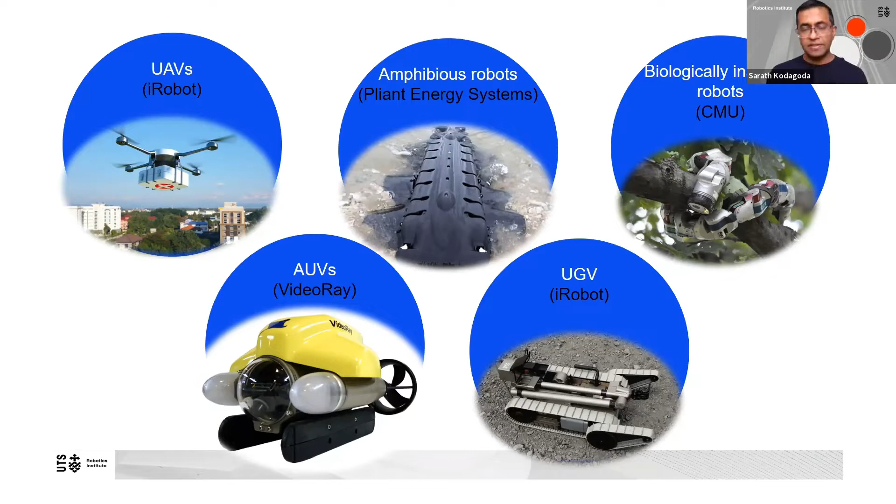But today, what I'm going to talk about is how the work that we are doing currently, which is in the areas of robotics for infrastructure maintenance and inspection, how can we use that technology maybe in disasters.

So I'm going to talk about a few of the pilot studies or examples, research areas that we work on, to give some understanding about how this robotics is evolving, what are the state-of-the-art robotics technologies which have been used to inspect and maybe repair different infrastructures. So one of them is critical water pipes, those are underground pipes, or underground sewer networks, or bridge inspections above ground, or the pylon inspections.

So when you look at the critical water structure, it is huge in any country. When you look at UK, US, and Australia alone, it is worth over $500 billion. And if you look at Australia alone, over 140,000 kilometers of underground pipes to deliver water from one place to the other.

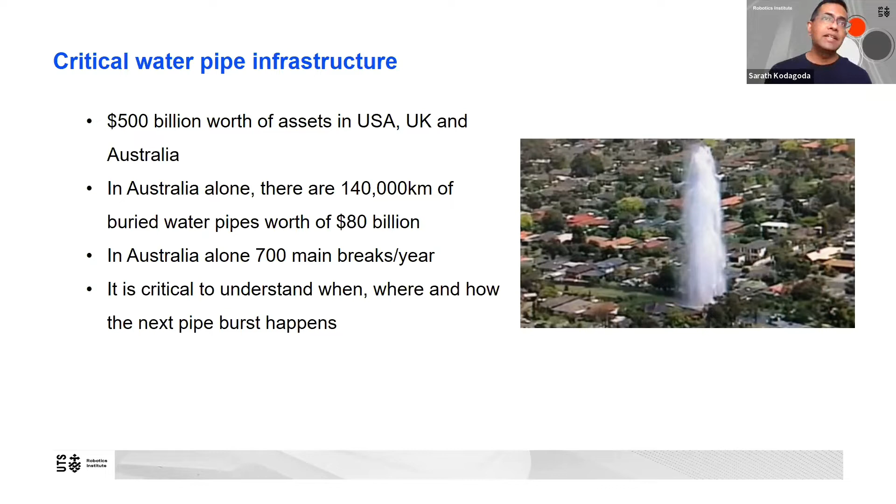Then how can we inspect that? You can't dig everywhere and expose the pipe and start inspecting. You need to have some other mechanisms. One of the ways of doing that is to insert a robotic system which goes inside the pipes and then estimates how much corrosion happens, or in other words, estimates what is the remaining wall thickness of those pipes.

In the context of Sydney or New South Wales, most of the water pipes are cement-lined cast iron. It has a certain property of failure. It fails by destroying itself - in other words, it is brittle. The steel pipes don't have the same failure mechanism, but cast iron is going to be brittle. It will burst open.

So the corrosion which can happen because of the corrosive soil, or internal corrosion can happen because of the presence of moisture - both can corrode, but because those are cement lined, the internal corrosion is less. Then it's a matter of coming up with sensing technologies in order to figure out how much is the remaining wall thickness, and also to figure out how these sensors can be deployed in pipes.

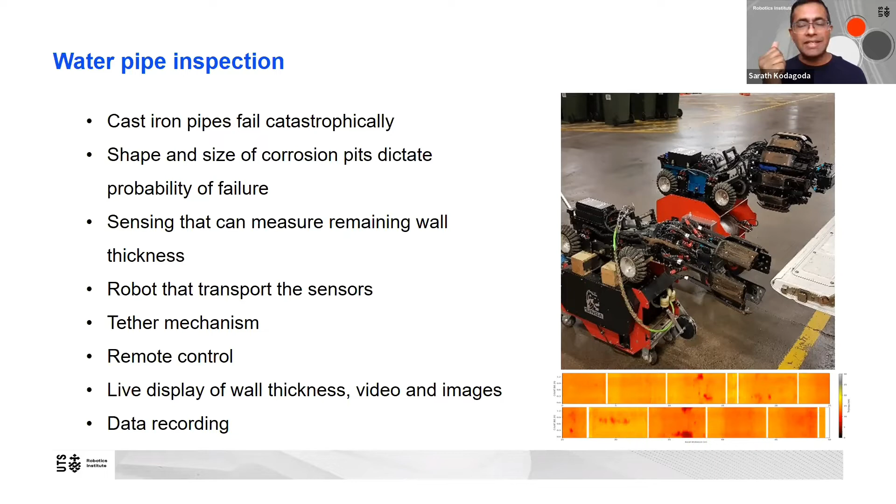So, different requirements from different utilities. As you can imagine, the water pipes are bigger and small - it has a huge range. The water pipe coming to your house is small, then it gets bigger at street level, and even bigger at suburb level. So it has a range of diameter. How could you design something in order to cater for that?

There can be bends - 90 degree or 45 degrees are common. So how could you still manage those bends? So there are many challenges.

And the other challenge is, in most cases, the team that RI, Robotics Institute, how they are working at the moment is, when a pipe burst happens, Sydney Water calls in that team at UTS. So that team goes there and takes that as an opportunity to deploy the robot from that burst point, because the pipe is already shut down, and then go both sides and estimate what is the remaining wall thickness. They don't want to see any other burst happening next to that site.

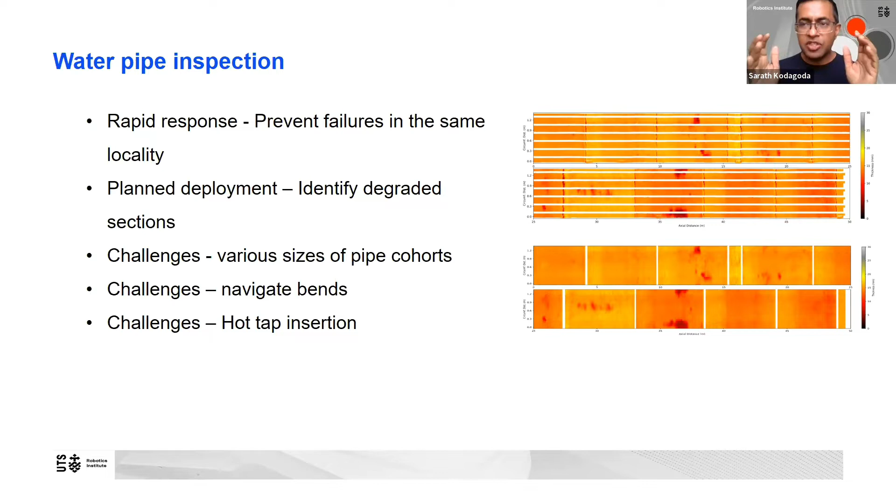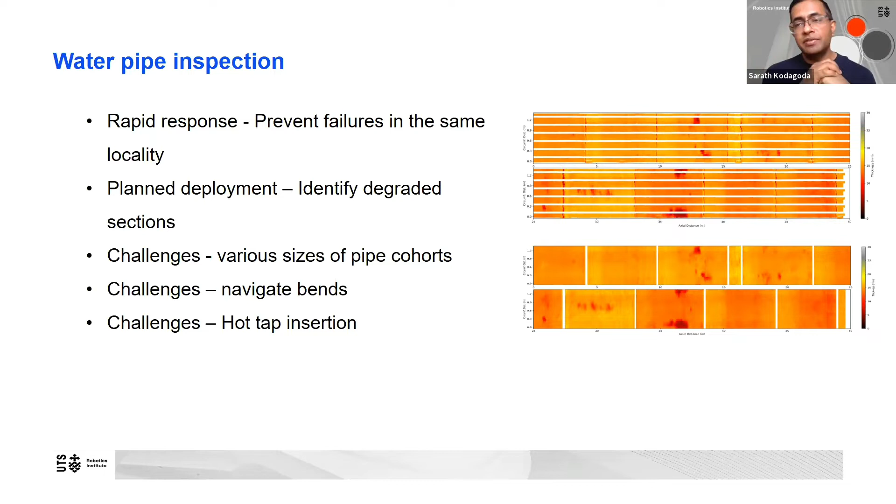The third type is - in the two types I mentioned, the main need to be shut down because those are high pressure, and it's very hard to work with that. The third type the team is working on is what we call hot insertion type robots. They want to use a water hydrant, and with the mechanism, the robot is going to be inserted while the high pressure water pipe is in operation. So it's very challenging, but the team is working on that.

So I'm going to show a video here.

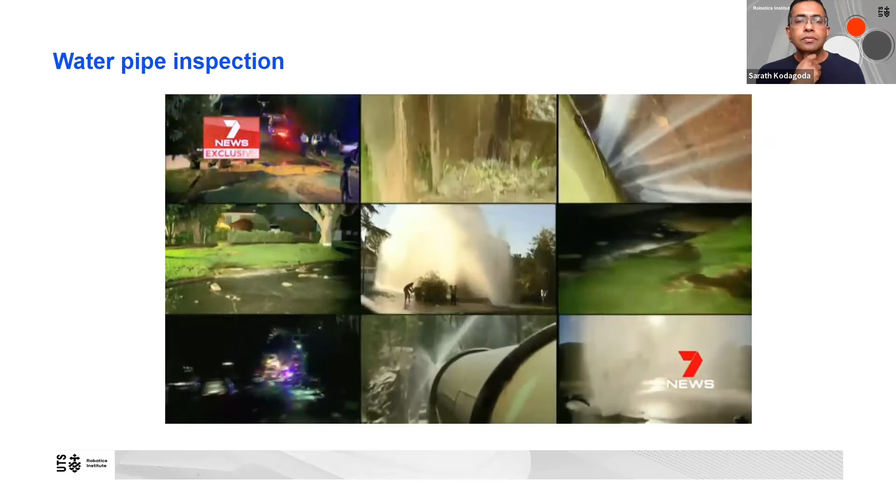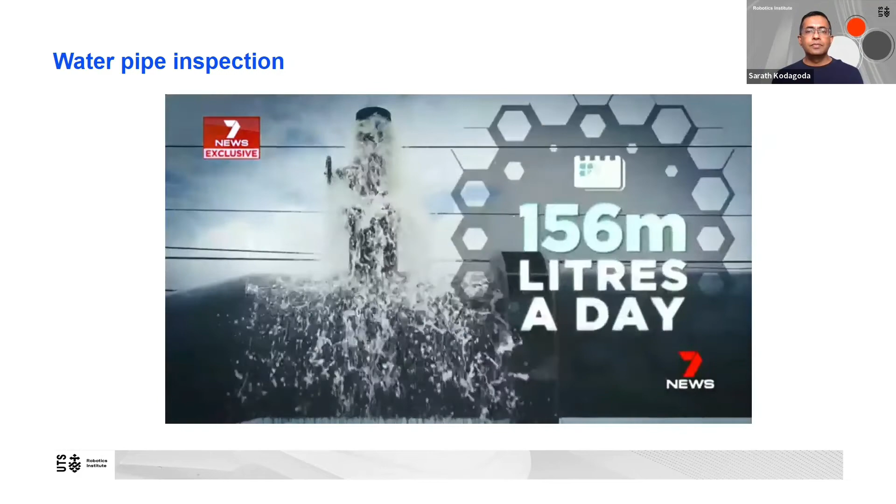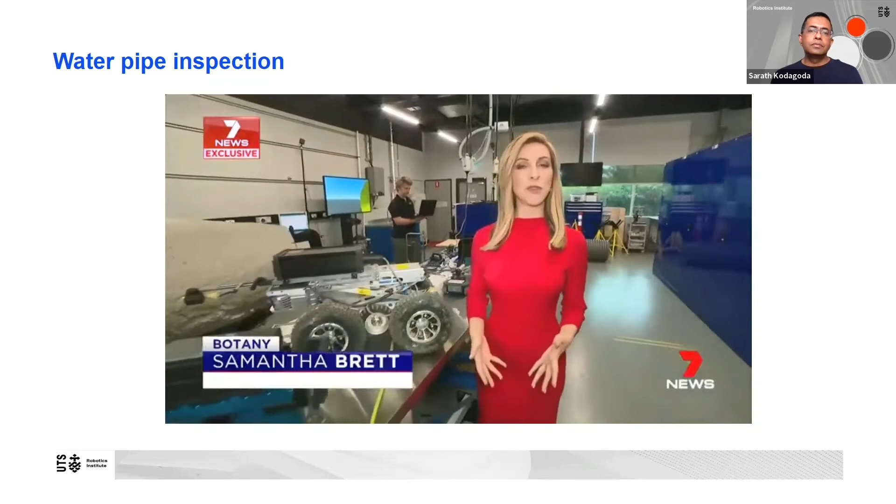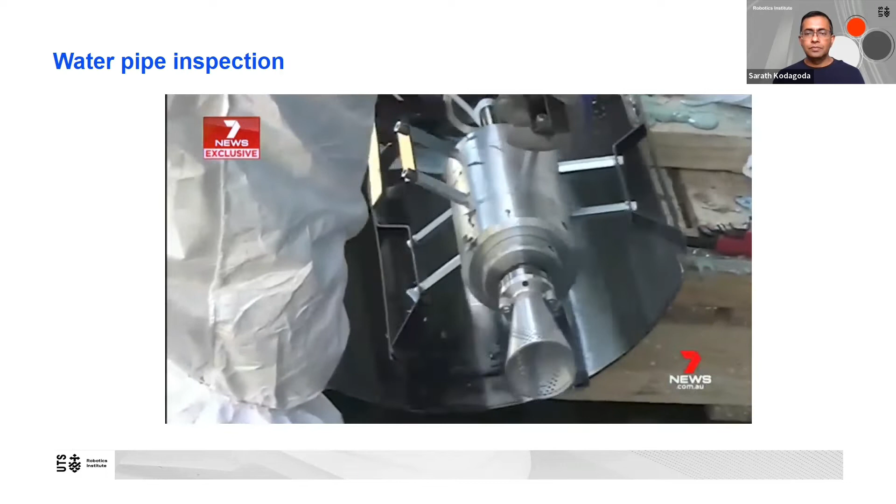It's called the R2-T2 Rapid Response Robot, being used right under our homes across Sydney. A new solution to an old problem: leaking water mains, wasting precious water at a time of drought. One of the challenges in a drought is that with the drying surface underground, it can crack pipes. Sydney has around 175 major leaks every year, losing 156 million litres per day - that's more than 60 Olympic swimming pools. Now cracks and corrosion can be detected without digging. Today we were given an exclusive first look at the high-tech solution. Really exciting - there's a whole host of possibilities in terms of what the technology can offer. The R2-T2 is the first of its kind in the world, and now Sydney Water is hoping to create a fleet of robots to cover its entire network, and other parts of the country are now interested in the technology. Created by engineers at UTS, technicians can watch in real time using virtual reality headsets while the robot surveys the pipe. And to have this technology now at the front foot of ensuring that our water supply extends as long as it can is really important. The cracks can now be fixed with quick drying epoxy spray coating - no need to replace the entire pipe.

One reference in that was the drought, but this video was recorded some time back when we had the drought. Now, most of you know that we are flooded with rain, so it's a different scenario, but the problem itself is still there.

The other aspect I wanted to talk about is the other type of infrastructure, which is sewers or wastewater pipes. Again, any city has a network of infrastructures. The difference is they may not be metallic - they may not be cast iron or cement-lined pipes. Most of them that you see in major cities are huge, and they are not really round shape. There could be many different shapes. So the challenges are different, and most of them are cement or concrete tunnels, reinforced or not reinforced with metals.

Australia alone has around 120,000 kilometers of sewer pipes. It's long, but as you can imagine, the sewer pipe going from your home is small. When it goes to the street level, it's bigger. When it goes to the suburb level, it's even bigger. And even in the cities, this could be huge, so that people use boats to go in there and do the inspection.

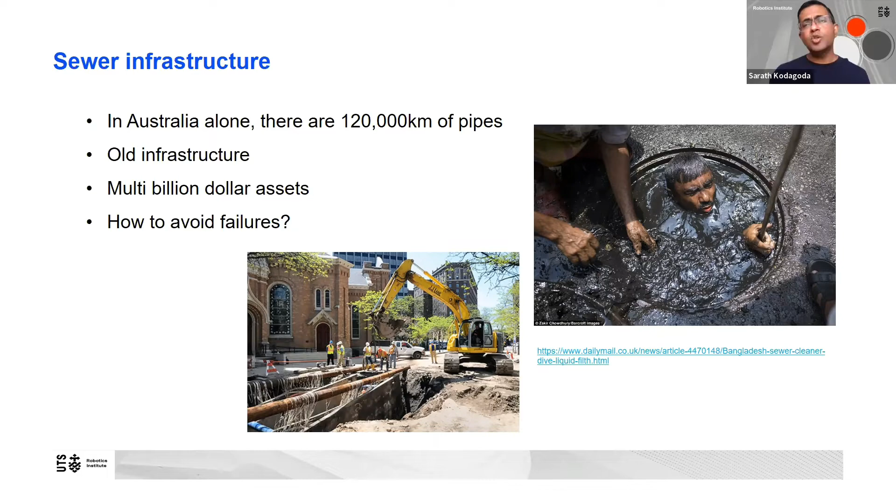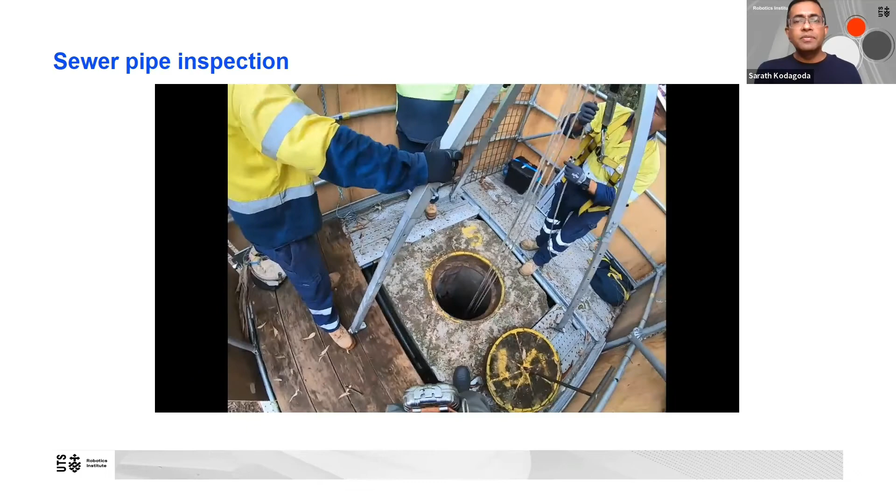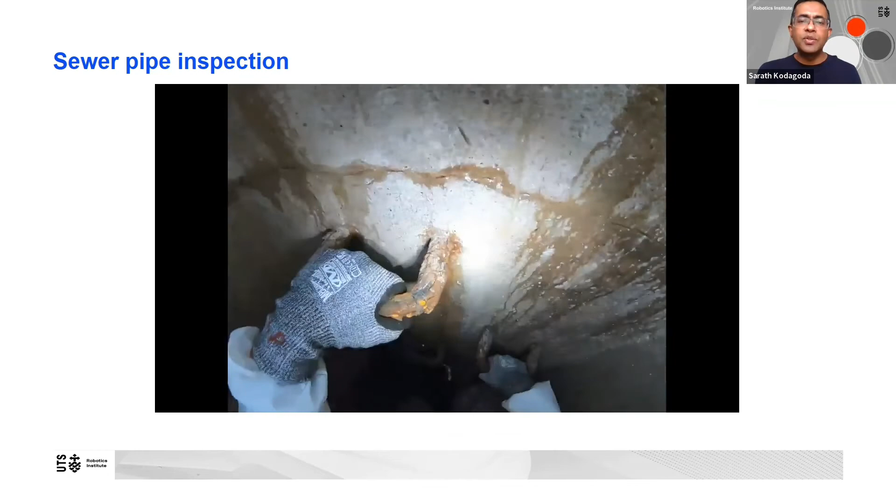This will give you a brief rundown of what a sewer looks like. This is one of our guys going inside the sewer from a manhole. Think about this - it's a very small manhole, and he's capturing the data while he goes down because there's a GoPro mounted. And this is supposed to be a reasonably good sewer. So he goes down, have a look.

What we are dealing with is something like this. There are other pipes connecting, so water can fall from there. There are cockroaches and other species there.

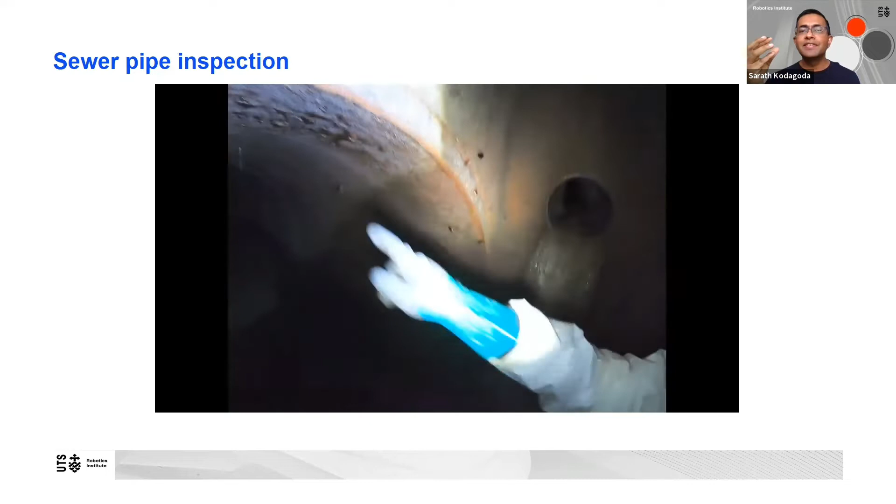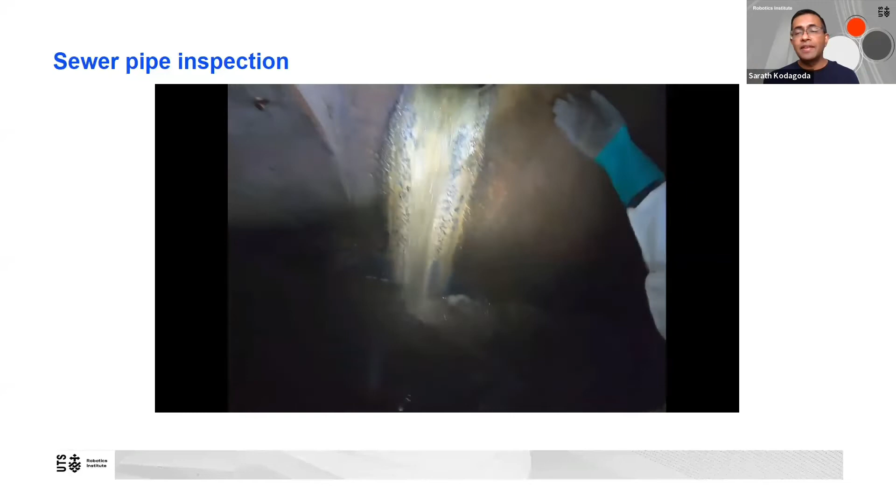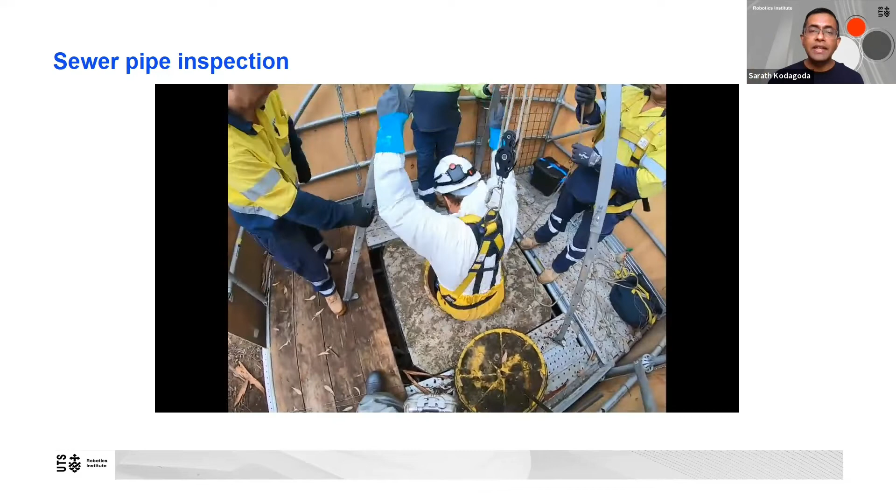There are areas which are corroded, areas where water comes through other pipes causing turbulence. One good thing is the sewer is not 100% full. The bad thing is there are so many things in the sewer.

The things that you flush and the things that are unintentionally or intentionally put into the sewers - everything is there. Just to give a brief idea about how sewer corrosion happens, I use the word corrosion - this is not metallic corrosion, this is concrete corrosion.

So when we flush things, there are sulfates in that waste, and then in anaerobic conditions, this converts into hydrogen sulfide. This is dissolved in water, and then when turbulence happens, it becomes gaseous hydrogen sulfide. There are bacteria living on the surface who consume that hydrogen sulfide and convert it into sulfuric acid. Sulfuric acid attacks the concrete, making it brittle.

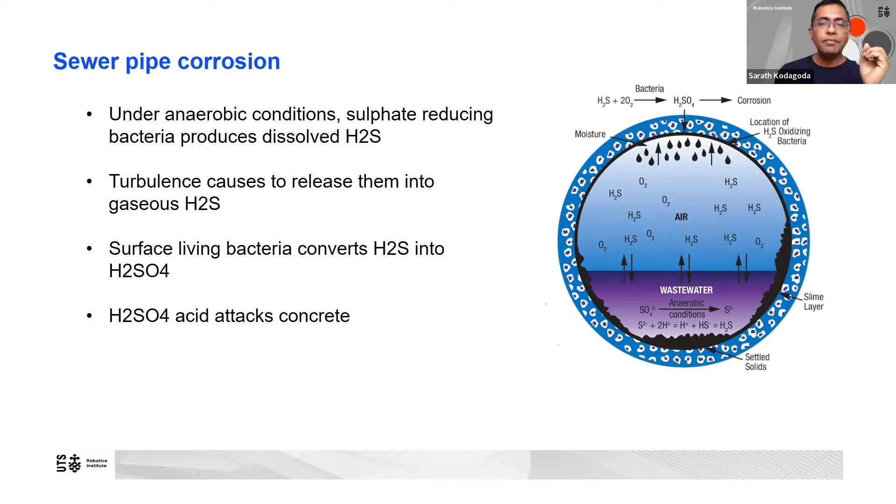That is called corrosion. So in the sewer, you have a corroded layer or brittle layer, then reinforcement bars, and then the good concrete. If you send a CCTV, you will only see the surface - you don't know how much corrosion or brittle concrete there is. Without knowing that, it's difficult to do rehabilitation because you don't know what you are looking at.

So the project we are working on is to identify what good concrete is left - what is the level or depth of good concrete remaining.

We have developed this robot, which floats because you can't normally stop sewers. There are so many things in sewer water, including human hair and tissues, which can easily clog a wheeled robot. So this particular robot was designed in such a way that it floats with gravity.

At the same time, it can expand its arms, which have sensors like ground penetrating radar or pulse eddy current, in order to scan what is happening underneath the surface.

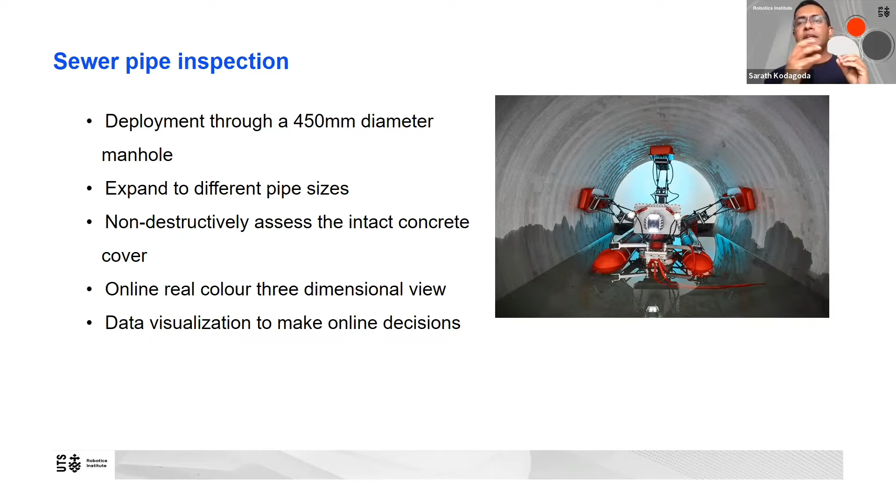At the same time, it needs to be tethered - otherwise it's very hard to retrieve if something goes wrong. So what we proposed is manhole-to-manhole deployment, which could be up to 300 meters between two manholes. So you deploy from one manhole, it goes to the other manhole, and you retrieve it from there rather than having to pull it back.

So this is what you see once you do that scanning. It will three-dimensionally reconstruct what the tunnel or pipe is, and then figure out whether there is corrosion and what the depth of that is. You can overlay that on this.

Then it will figure out where the reinforcement bars are with respect to the surface, and that is integrated into this visualization. So you have all the information you require in order to make renewal decisions.

And this is one of the deployments. It is logistically significant - you need to have tripods, you need trained people in order to deploy it through that manhole, and then you have a remote control station in order to visualize and see what is going on.

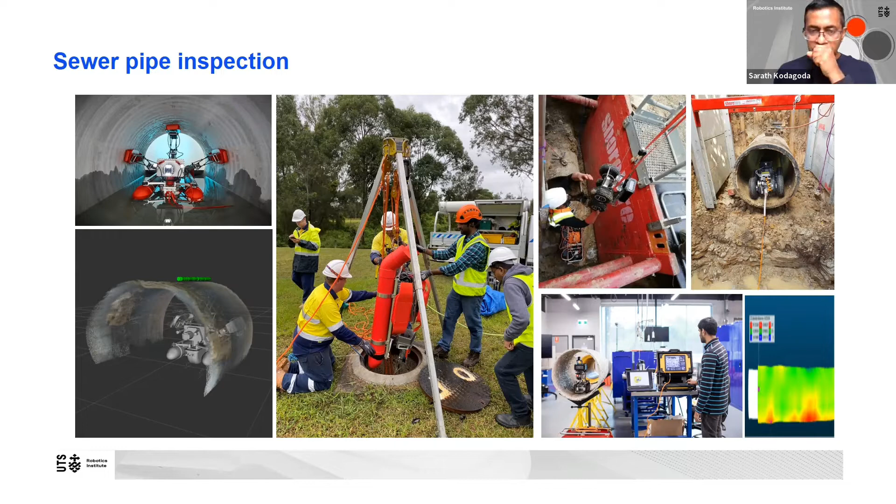This is another video that will give you some background about this sewer robotics.

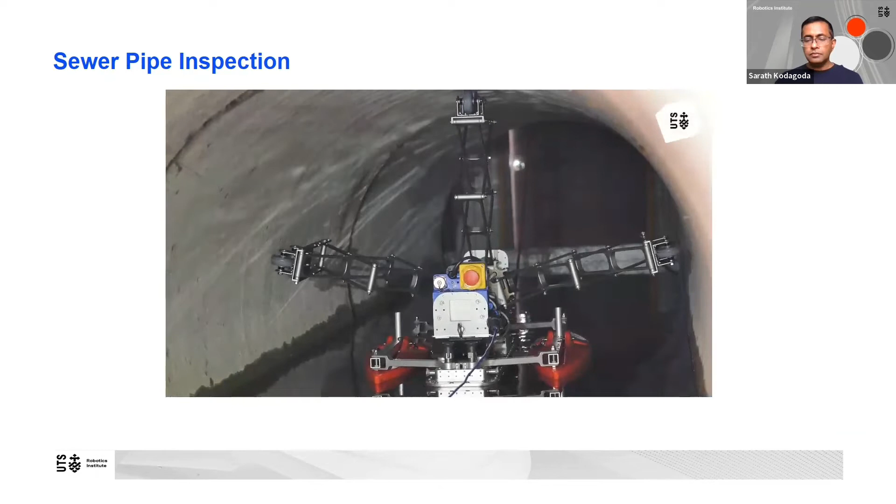Sewers are an integral part of any society. This issue is an international multi-billion-dollar problem for water utilities around the world. Today, we walk the sewers and make decisions based on judgments rather than evidence. This is a great innovation that would be useful to any utility around the world.

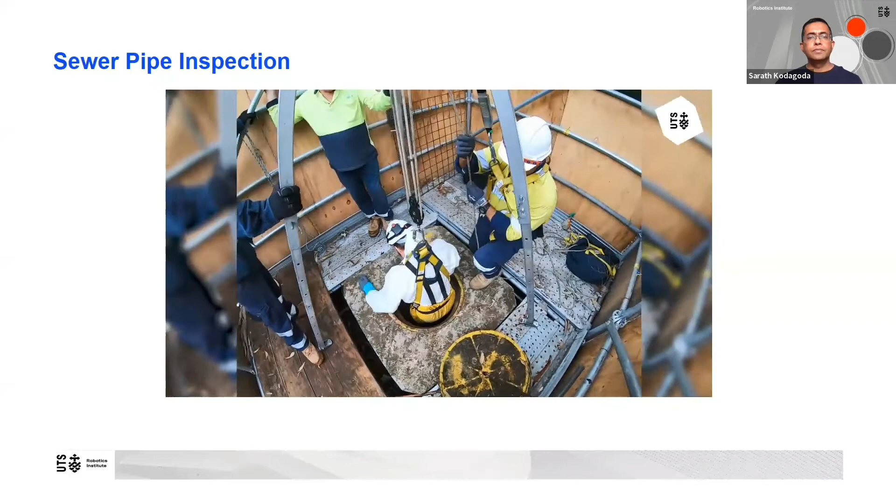Sewers obviously carry wastewater from our homes and industries, and have operational, environmental and asset concerns. We're looking to address that by finding new ways of doing things with our partners at UTS.

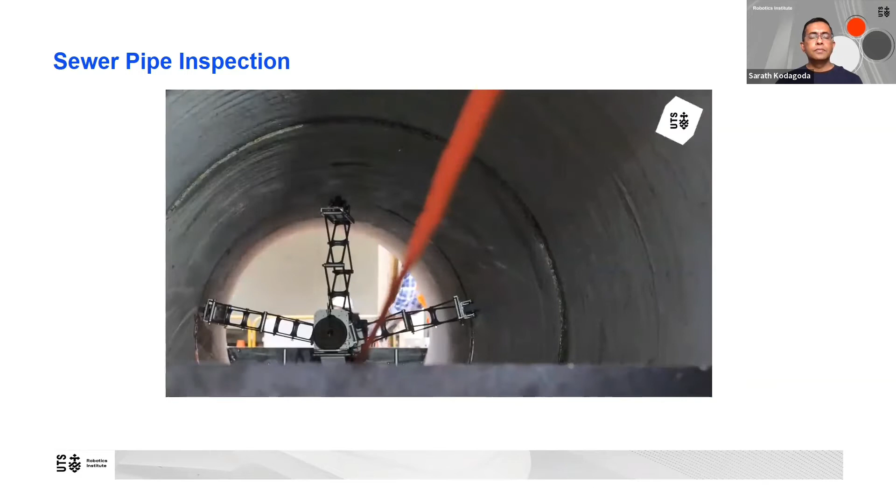This project has two main challenges: one is in sensing, the other is in deployment. The sensing challenge is handled through a multi-sensor data fusion approach, with sensory data coming from different sources, combined through state-of-the-art machine learning technologies.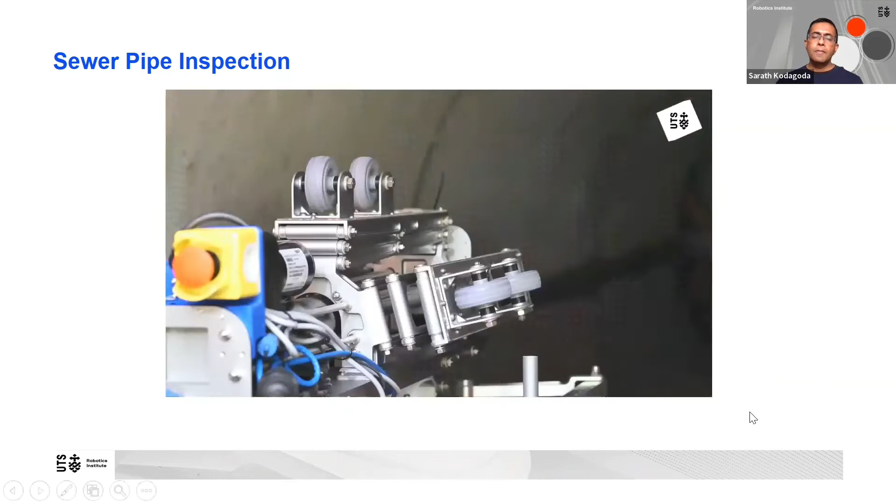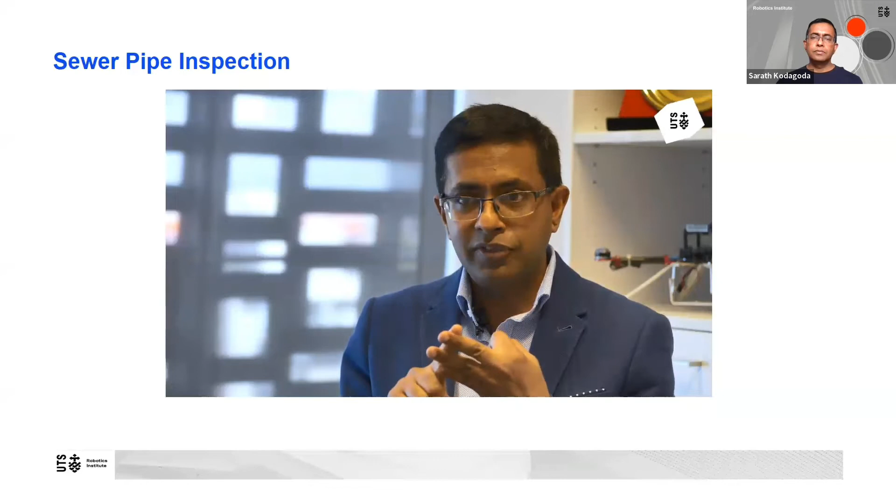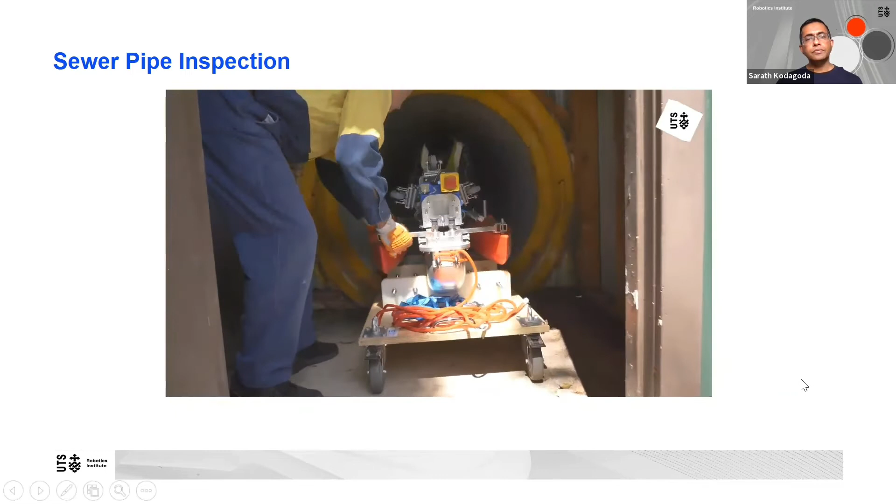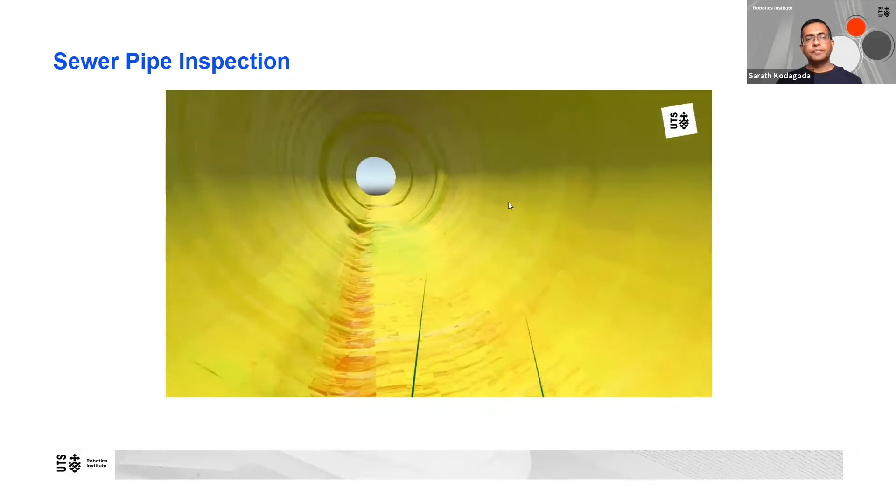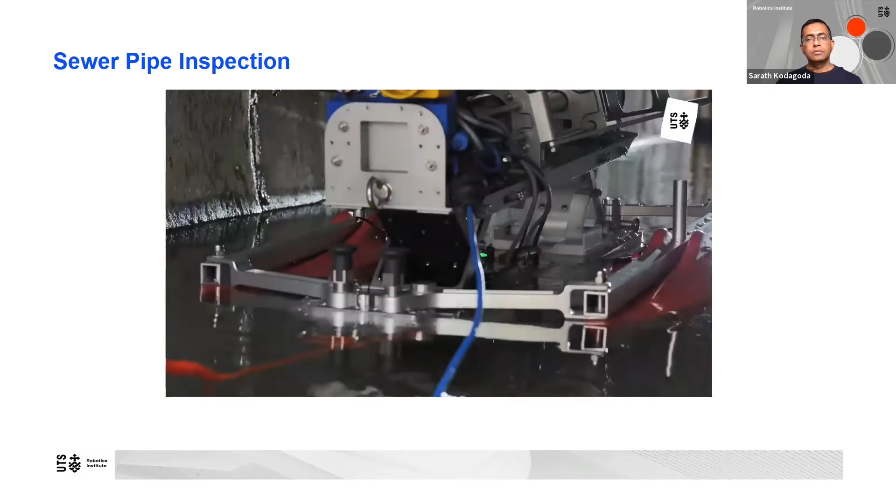Finding new and better ways of working through innovative technologies is really important to us at Sydney Water. We spend around $40 million a year rehabilitating our sewers to make them work for our community and our customers. We have found that working with UTS, identifying new technology in robotics and sensors, allows us to do it cheaper and more efficiently.

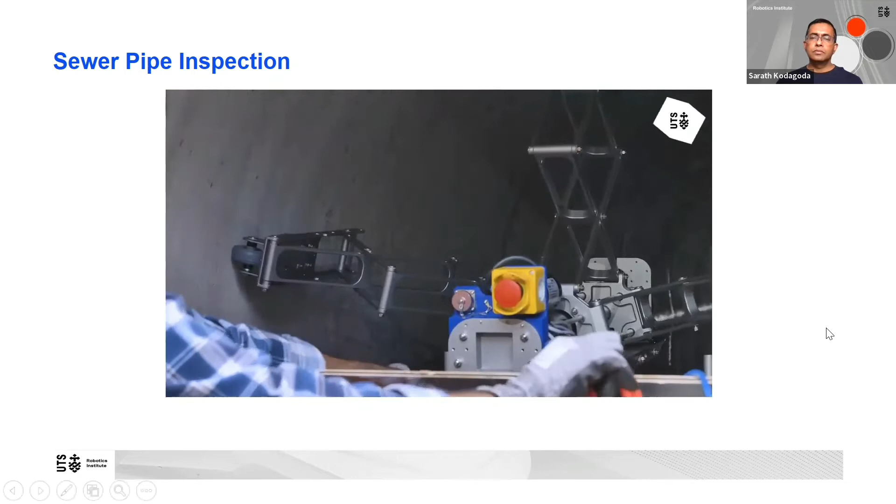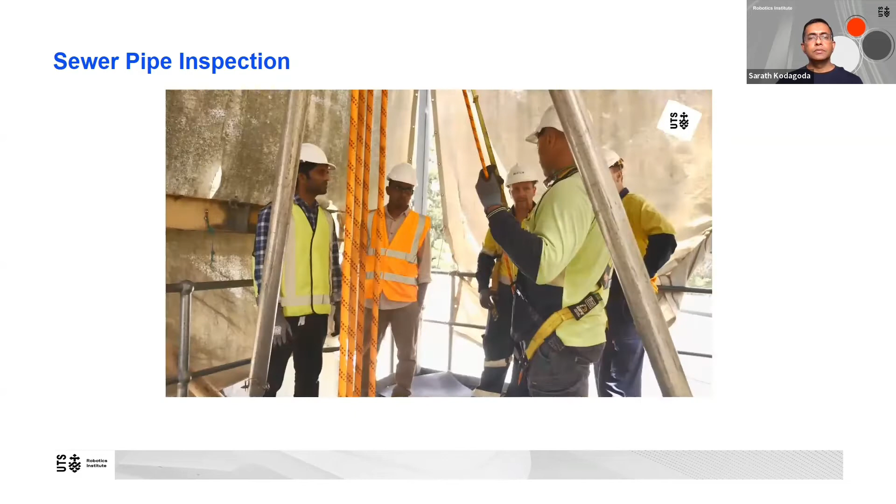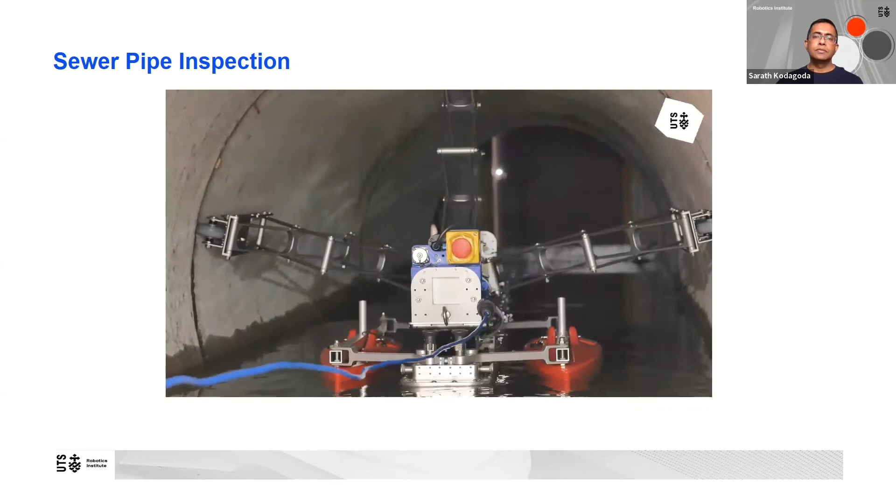This will save us time, money, and obviously address the safety component of working in confined spaces in our sewer systems. One of the most important things for us is how we operationalise this new innovation, turning it from a pilot or lab-scale study into an operationalised output. We are working closely with our delivery partners on how we can get robotics and sensors on the ground in our infrastructure to deliver benefits to our communities and services every day.

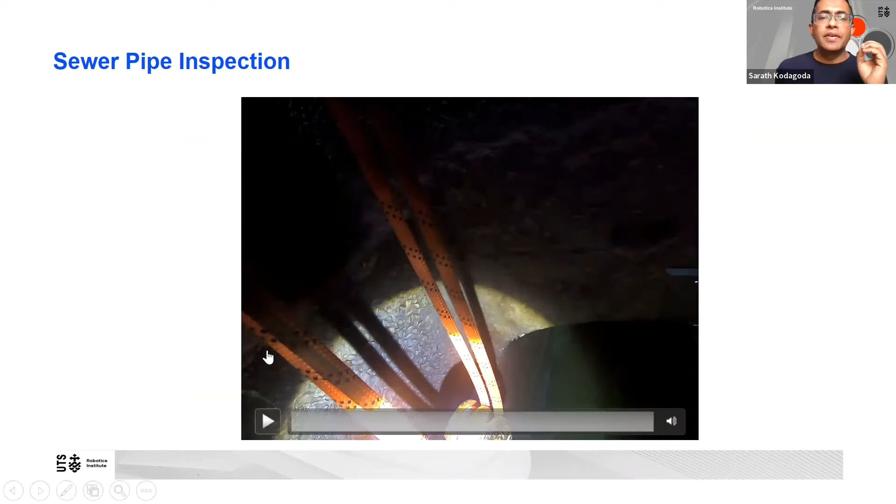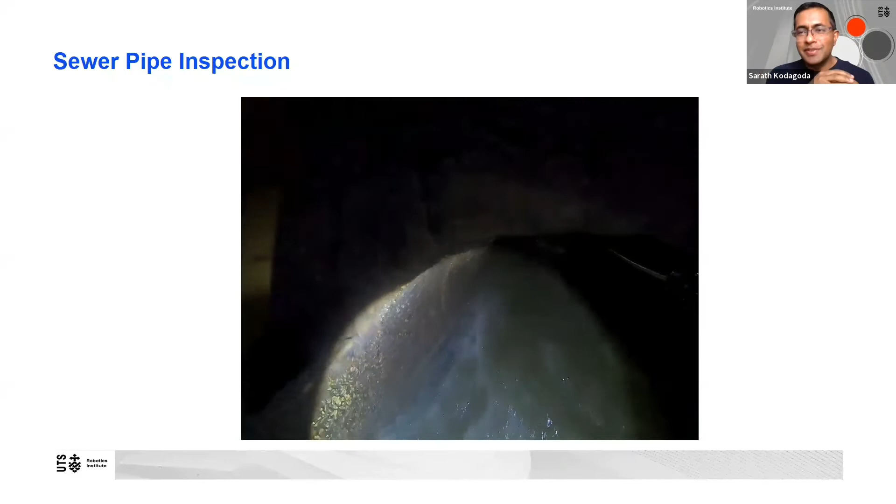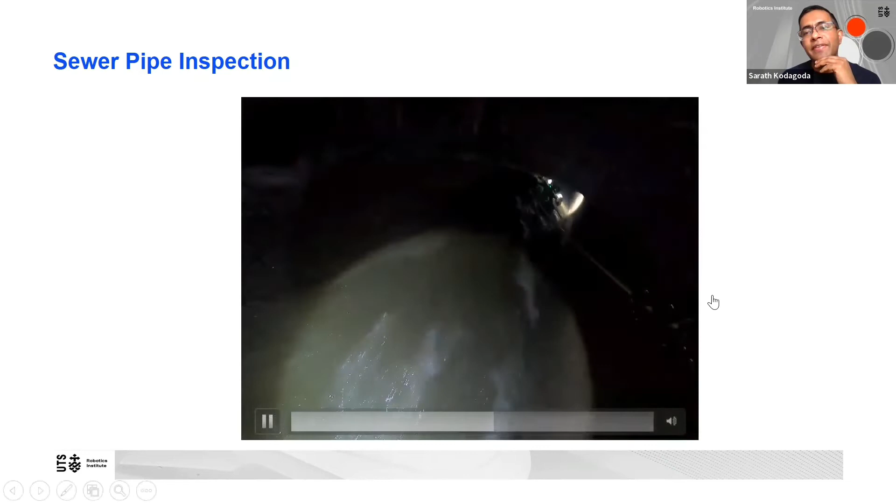This is another video of a real deployment, so you get some idea about the noise level and the environment. One thing I can't show you in person is how the water is flowing at a faster rate with turbulence, and you have bends in the pipeline. Just to show a real deployment - the one you can see out there is the robot, and this is the tether. This is taken from a video screen, the camera which is mounted on the operator.

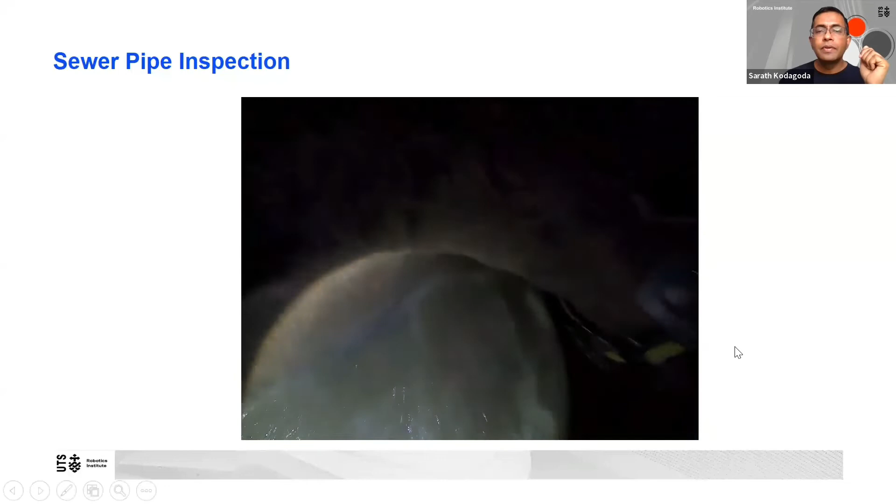The next thing I want to talk about is bridge inspection. So it is above ground, and the challenges are different. One famous bridge is the Harbour Bridge, so we have several robots. Our colleagues have developed several robots which can inspect for corrosion and do some repairs.

So the challenges are: every 2 years, people are deployed for inspecting, starting from one side of the Harbour Bridge and going to the other side. It takes roughly 2 years, and then they start again. Not only inspection, but also grit blasting. The grit blasting component is tricky and hazardous because the back pressure can develop back pain, and it can involve lead. So it is not a great environment for humans.

Therefore, the RMS, Roads and Maritime Services, has started negotiating a project with my colleagues to develop this robotic system which can scan the outside of the arches and identify areas where paint needs to be grit blasted and removed because it's corroded, and then does that grit blasting with a robotic system. So somebody can be away at a remote control station while the robot is doing that work.

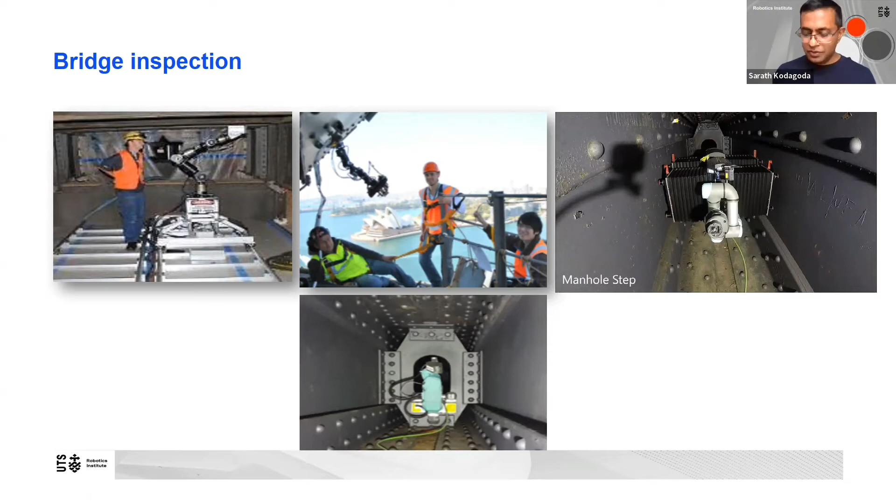At 81, the Sydney Harbour Bridge does look good for her age, but requires constant maintenance. It is, as you'd imagine, an enormous task. The bridge was built using 53,000 tonnes of steel. The surface area to be repainted is about the same as 60 sports pitches. Two robots called Sandy and Rosie have been brought in to do some of the more dangerous and awkward jobs in hard-to-reach places. Their mechanical arms are 2 meters long and have half a dozen joints to give them the dexterity they need to blast away old paint and rust from one of Australia's most recognisable landmarks.

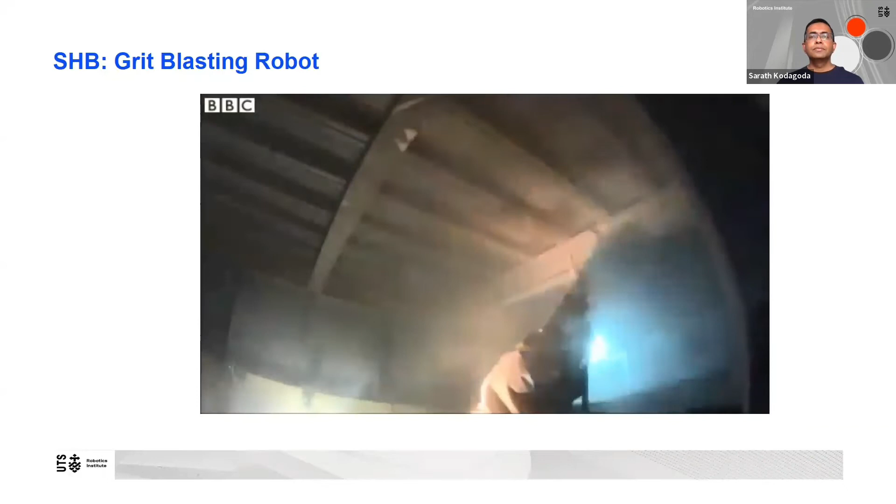The robots use sensors and cameras to navigate unfamiliar terrain. The technology is the result of a 6-year collaboration between the University of Technology Sydney and the New South Wales state government, which wanted ways to protect workers from lead paint and other hazards. The challenge for researchers was to build a machine that could work in such difficult conditions. The Harbour Bridge was opened in March 1932. It was an engineering wonder then and still is today. It's held together by more than 6 million rivets and is a vital cog in Sydney's overstretched transport network.

It's an unknown, very complicated and cluttered environment, so our researchers had to go back to square one and rethink how the robot would figure out what to do. So it actually builds its own map. It takes pictures and three-dimensional data, maps it all together, and uses that as a three-dimensional image of the structure.

This is the world's largest steel arch bridge. Its total length is 1,149 metres. Repainting the grand old coat hanger that spans Sydney Harbour is a never-ending task. Robots Rosie and Sandy, which each weigh 25 kilograms, have become full-time members of the maintenance operation. They're not replacing their living, breathing human colleagues, but have become an important and intelligent part of the team that's keeping this grand old lady looking good in old age. Phil Mercer, BBC News, on Sydney Harbour.

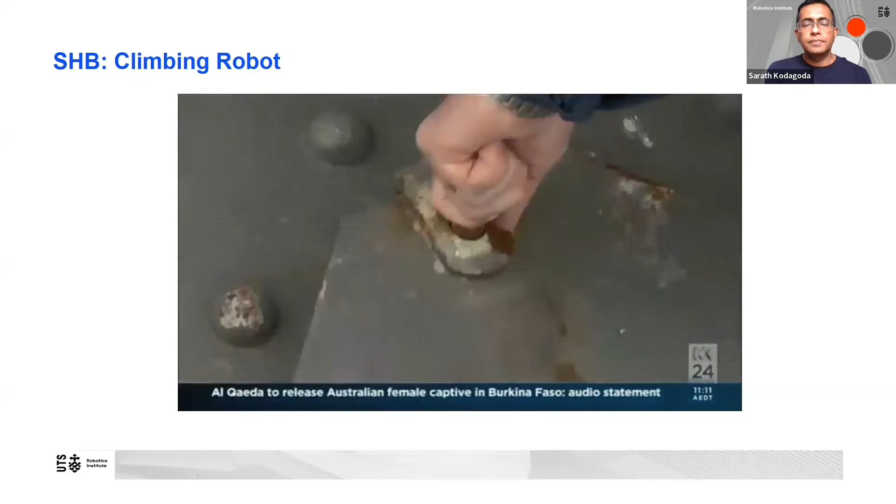A climbing robot designed to inspect hidden passages inside the arches. Engineers at the University of Technology in Sydney have teamed up with Roads and Maritime Services to develop the machine, which navigates around the pitch-black tunnels, checking the condition of the bridge. The Harbour Bridge has her secrets, a vast network of hidden passageways. It's the first time this section has been opened in 5 years. The paintwork dates back to 1932.

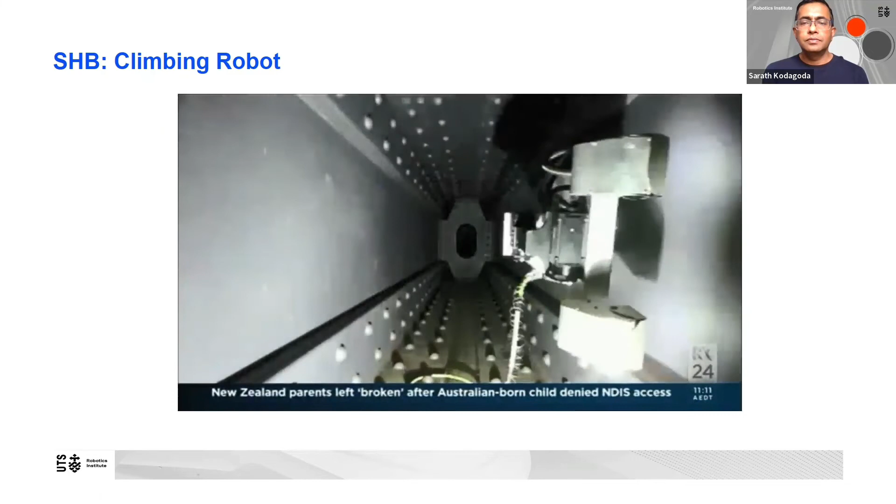This robot's designed to get into small spaces and climb around the arches, checking for defects. It's safer, definitely. It's better to send a machine into a confined space than myself, because if something happened to me, I would be blocked.

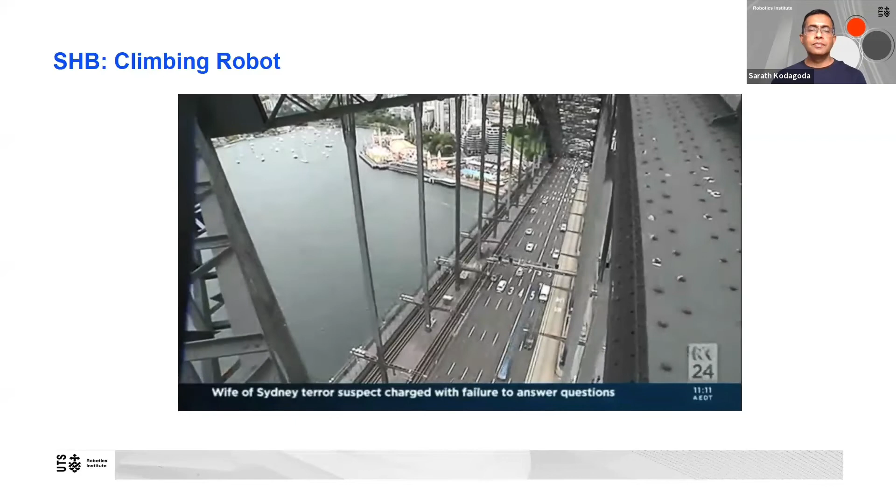High above the road, there are internal tunnels with steep drop-offs. There's no room for a stretcher, and small openings every 6 metres would make a rescue difficult, if not impossible. There's risk of asphyxiation, air quality is an issue inside the arch. These days we prefer to send robots in to do the dangerous jobs.

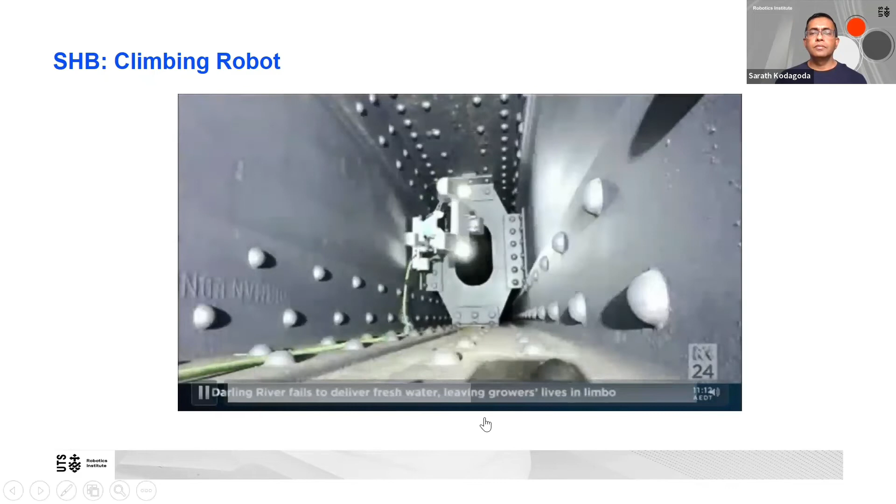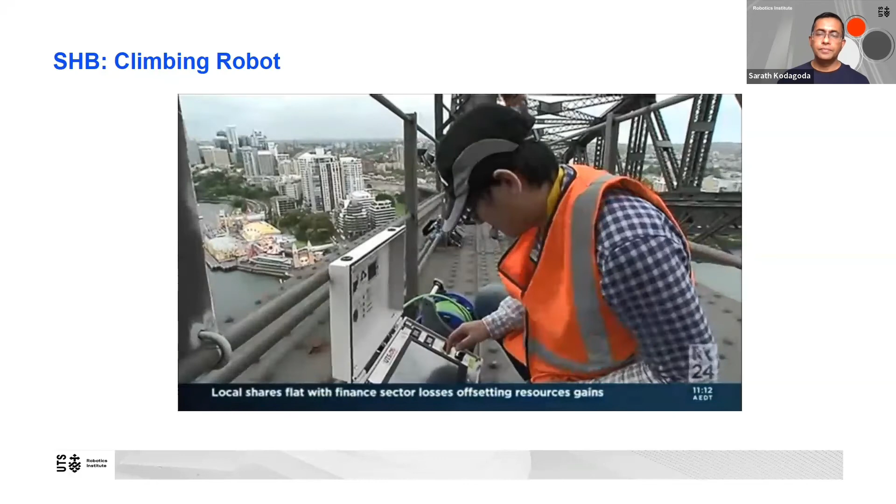The robot navigates using a 3D sensor, creating a map of the space and giving engineers crucial detail about what needs fixing. There are more than 7 kilometres of these narrow passageways along the arches of the bridge, and the next stage of this project will see a robot clean and paint the area at the same time. The next robot will use lasers to vaporise rust, have a vacuum to remove it, and a machine attached to paint safely without the need for workers to delve inside.

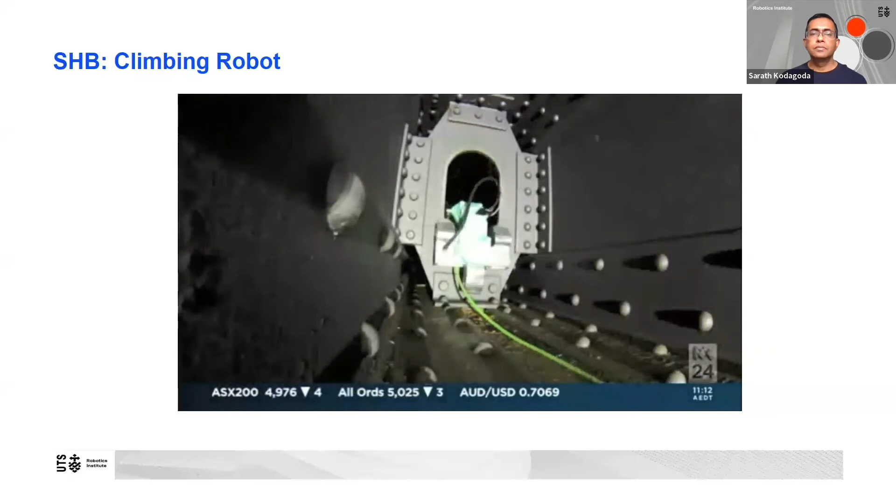We can use this on other structures, like transmission towers, ship hulls, nuclear reactors - other places where you don't want to send people, where it's too difficult to access. Robots won an International Technology Award in Sri Lanka and a Work Safety Prize back home. It's hoped the next version, complete with lasers, will be ready in 3 years' time. Nicole Chettle, ABC News.

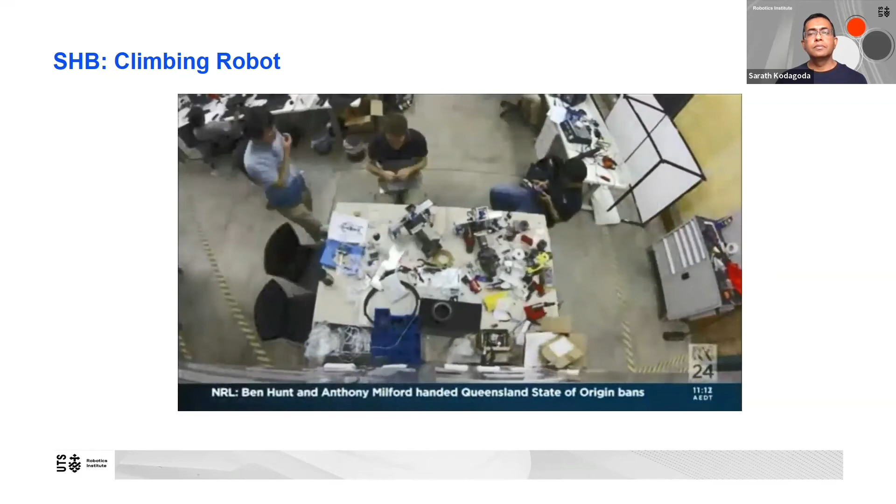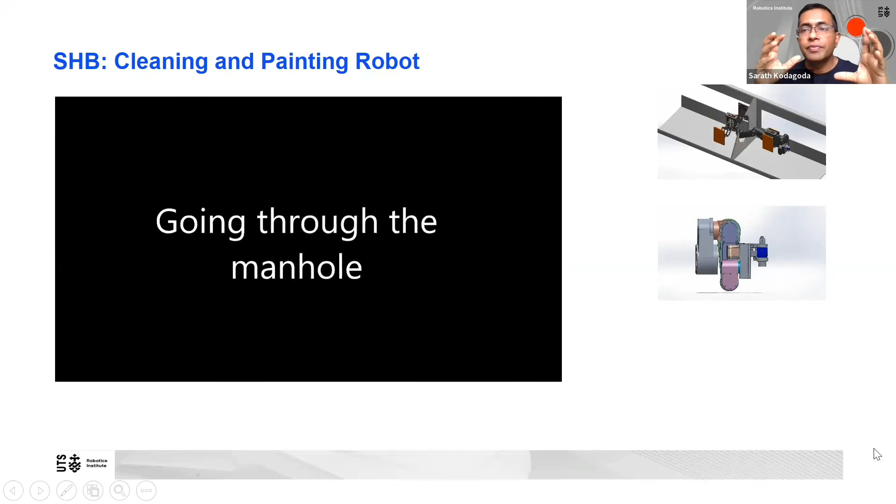The next robot, as mentioned towards the end of that video, is about taking a payload so it can remove the paint inside the arches. Because once it's inspected, if a human has to go there, it's lower risk because you know exactly where it is, but it's still risky. So RMS wanted a system that can remove the paint using a laser and then repaint. This robot was designed to carry a larger payload and perform that task.

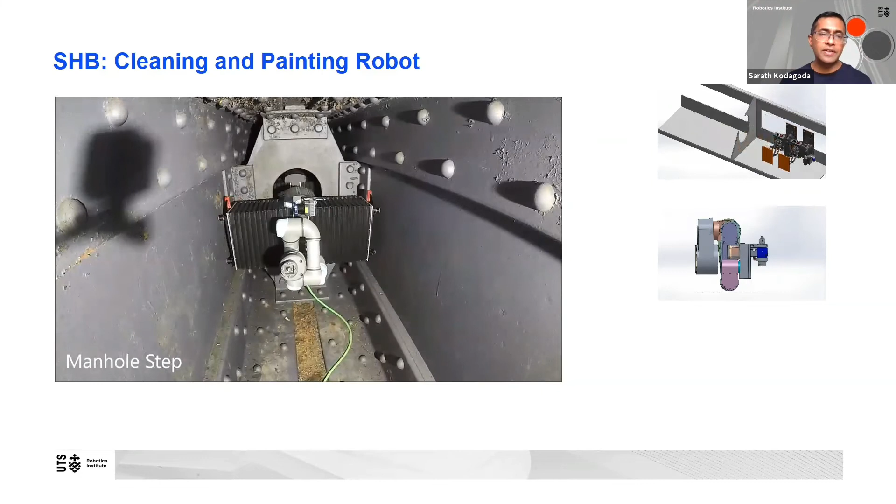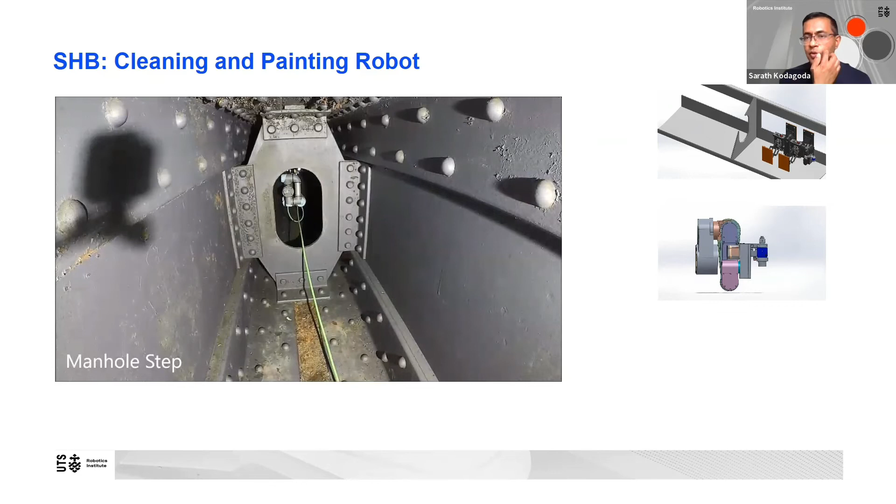So what you see here is the sensing mechanism, used to identify what's around it and map that environment. And this is the robotic arm, which carries the laser-based paint removal. As you can see, it's tethered as well, and it can go through the very small manholes from one section to the other - that's a requirement. So how it moves is by pressing its legs against the walls and moving forward. That's another robotic system used for inspection of these bridge-like structures.

So the next one I want to show you is about the pylons. The conditions are different because pylons have marine growth underwater. How it is removed at the moment is people dive and use a water blasting mechanism - high pressure water blasting. So all the marine growth is removed, but it's going to go onto that person. It's not a very good experience.

So again, RMS was working with our colleagues at the institute in order to come up with an underwater robotic system, which can go and hug into the structure, do the mapping, identify which areas have enormous marine growth, point the high pressure water gun, and then remove it. After removing, it maps again to see whether it is intact.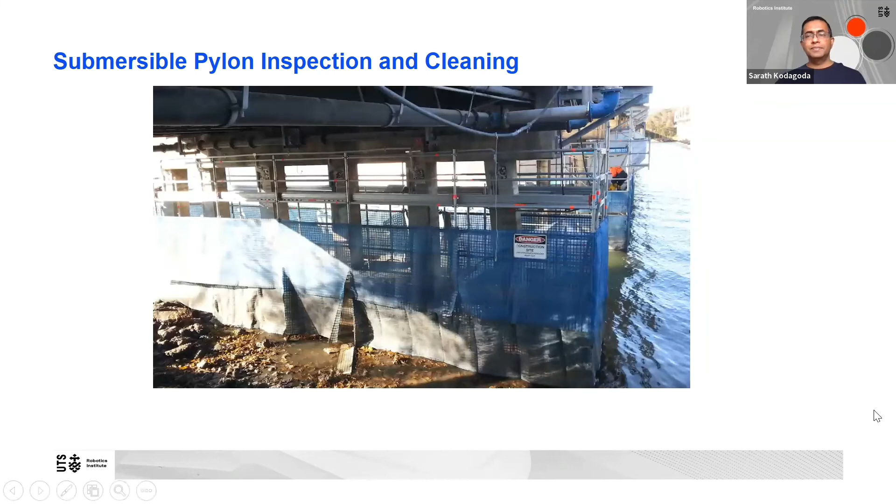So this video explains that. Routine inspection and maintenance of underwater structures, such as bridges and wharf piles, are important to ensure the integrity and prolong the lifespan of the structures.

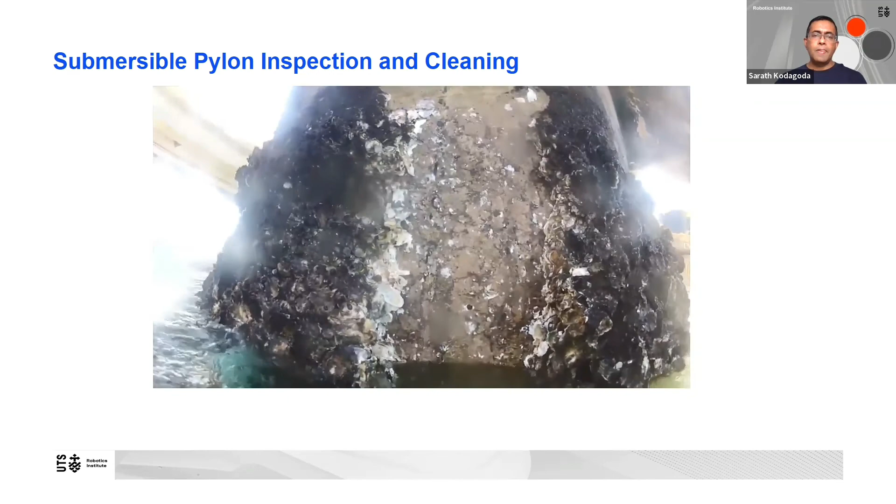In order to assess the condition of a pile, the covering crustaceans and other marine or aquatic growth need to be removed, either by high-pressure water cleaning or hand scraping. At present, this operation is primarily conducted by human divers, which exposes them to very hazardous work conditions, including poor visibility, strong water currents, high-pressure water jets, and working in awkward poses.

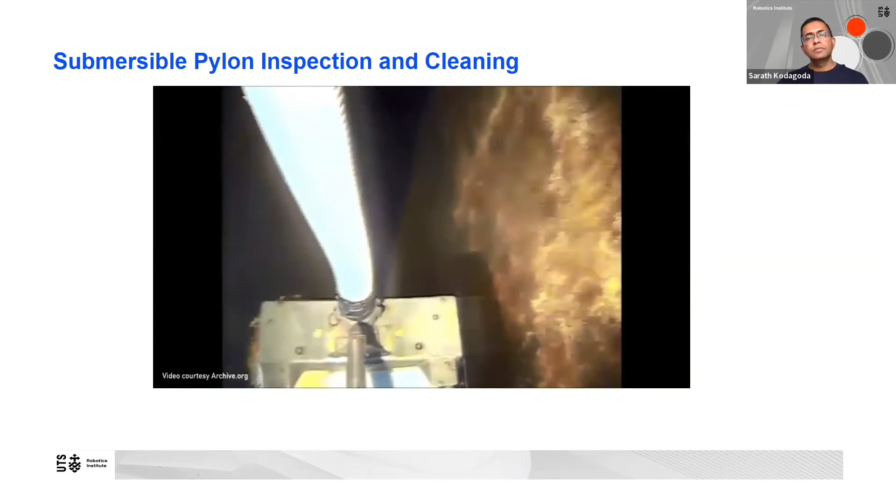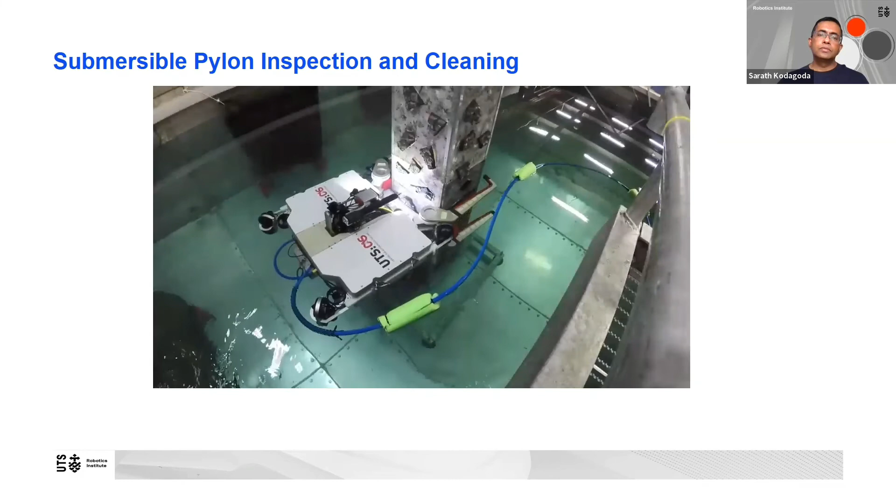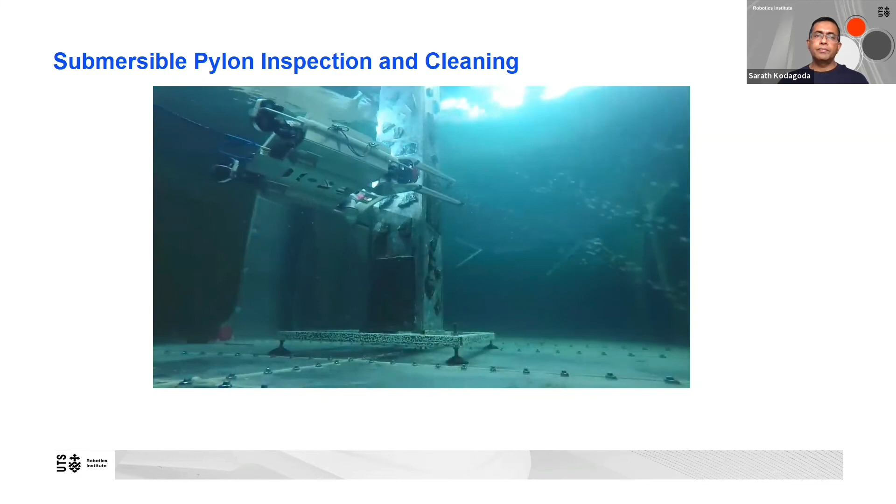There is an urgent need for innovative solutions to address these significant work, health and safety issues, and to improve the efficiency of condition assessment and maintenance of underwater structures. Researchers and engineers from the Centre for Autonomous Systems at the University of Technology, Sydney, and the Roads and Maritime Services of New South Wales have worked together to develop submersible pile inspection robots, aka SPIR, for autonomous cleaning and inspection of underwater structures.

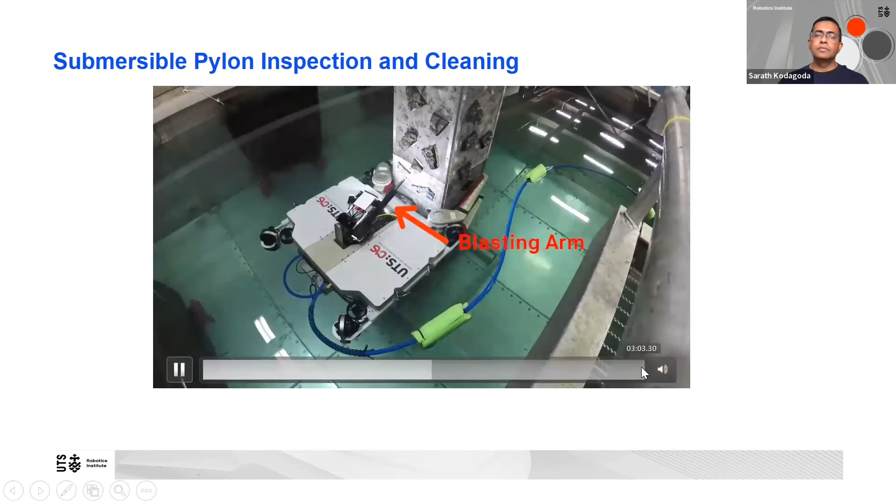The SPIR consists of claw arms used for docking rigidly onto a pile, an arm for surface cleaning using a high-pressure water jet, and an assortment of cameras and sensors for perception and environmental and operational awareness.

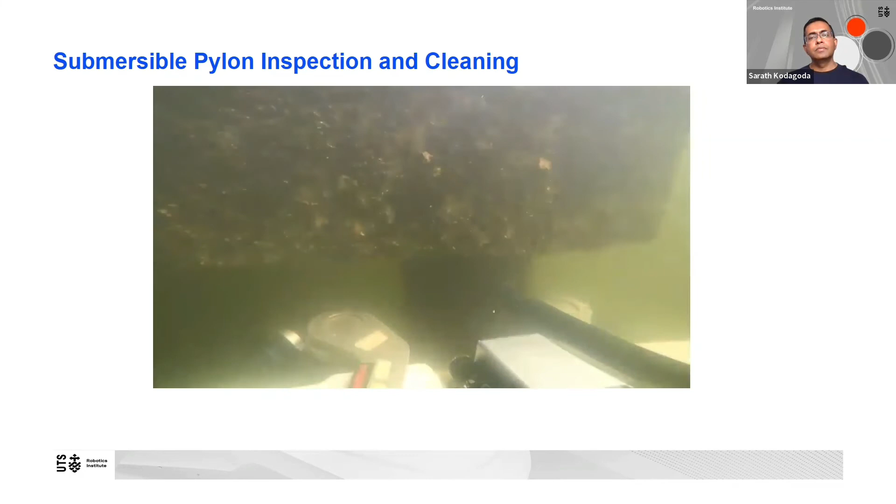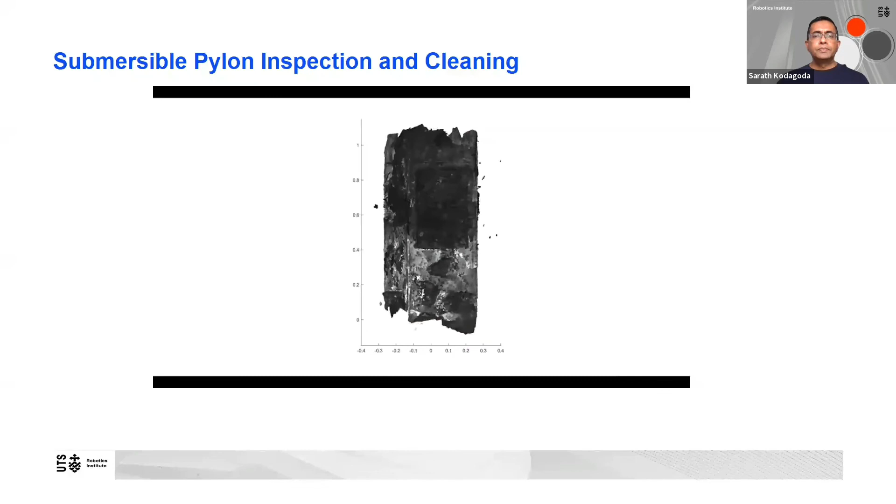Once navigated to a pile, the SPIR will conduct the operations autonomously, including simultaneous localization and mapping, identifying surfaces and marine growth, navigating and docking onto different positions around the pile, and planning and executing a water jet trajectory to remove the marine growth.

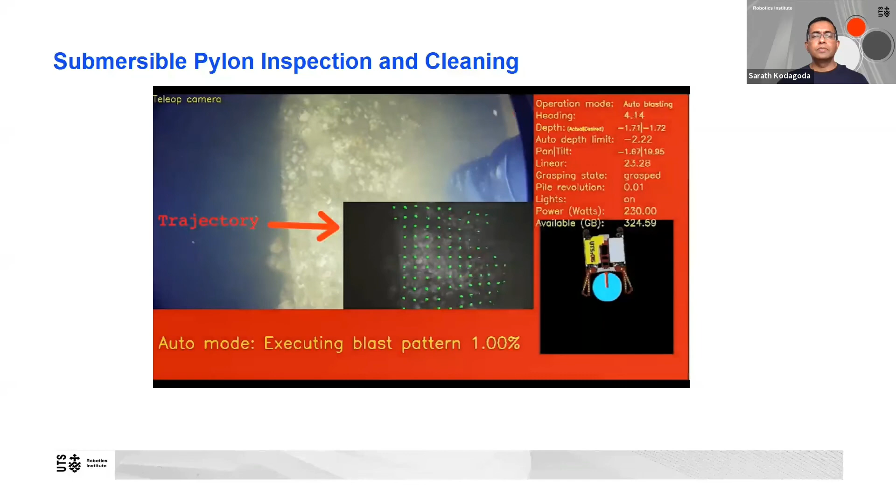After cleaning, the SPIR collects high-definition images around the pile that are geo-referenced with a 3D map constructed of the pile, which can be used by bridge inspectors for condition assessment.

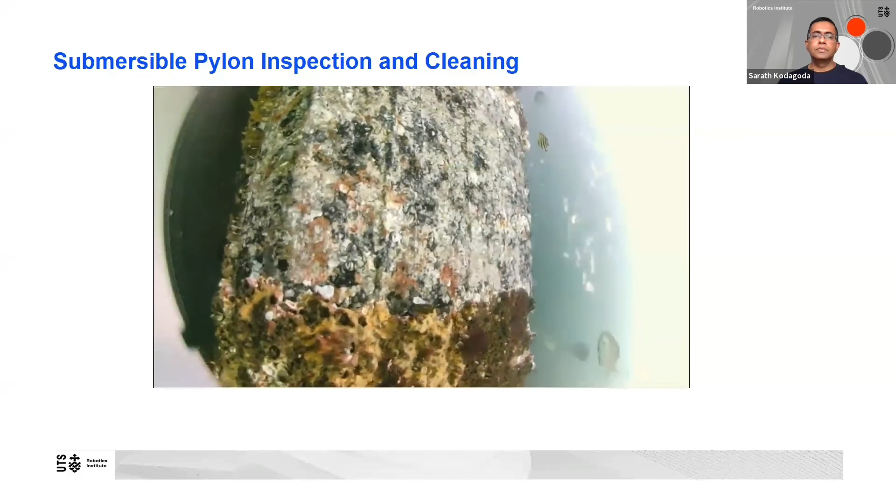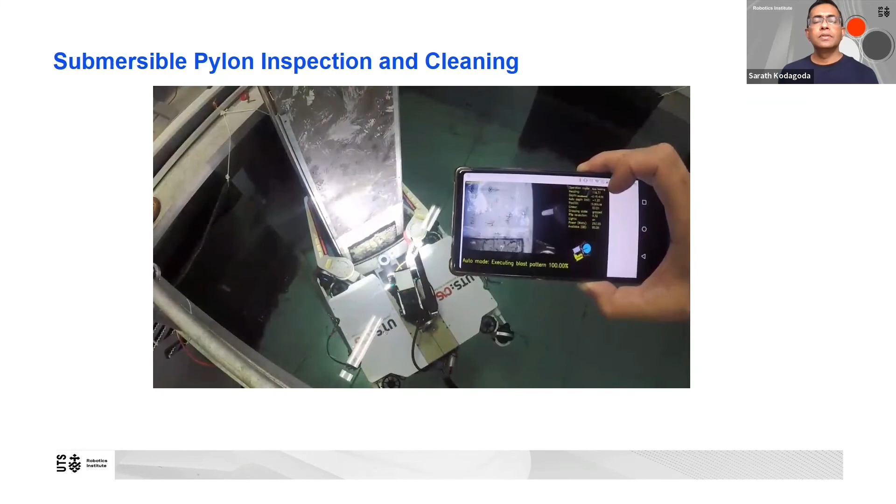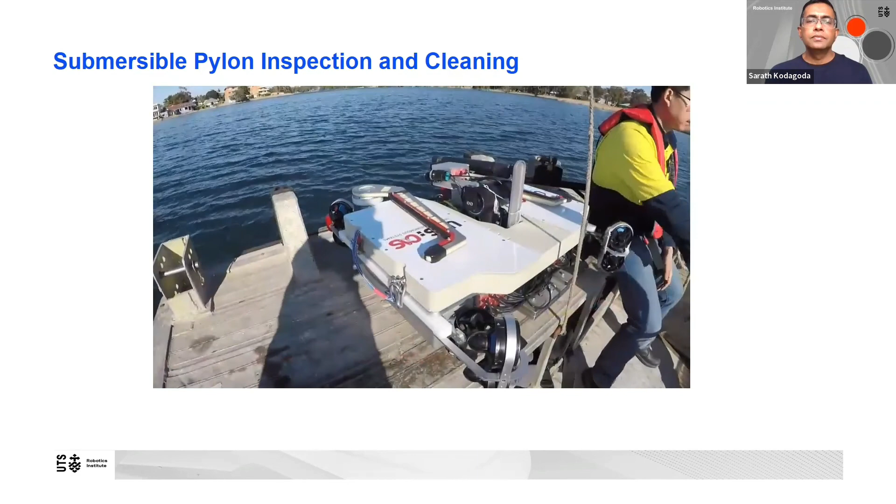A simple user interface allows bridge maintenance workers to monitor the operation and view live video feeds from the safety of a boat. The SPIR is applicable to other applications, such as autonomously cleaning ship hulls, offshore structures, and underwater pipelines.

So that is some of the work that we do in terms of infrastructure inspection. As you can imagine, or as you have seen, those are not particularly targeted at search and rescue scenarios. But as you can also appreciate, most of these technologies can be used in disaster situations in order to inspect pipelines, sewers, and the integrity of other structures such as bridges or towers.

There are a few challenges there. One of them is the sensing challenge - depending on the task, what are the required sensors in order to achieve that task? For example, what information is usually required? In these particular cases, it is about either visual inspection using cameras, laser-based sensors to map the environment, ground penetrating radars in order to penetrate through a structure and tell what is happening inside or under the surface, and pulsed eddy current sensors, which can tell what is happening with metallic structures.